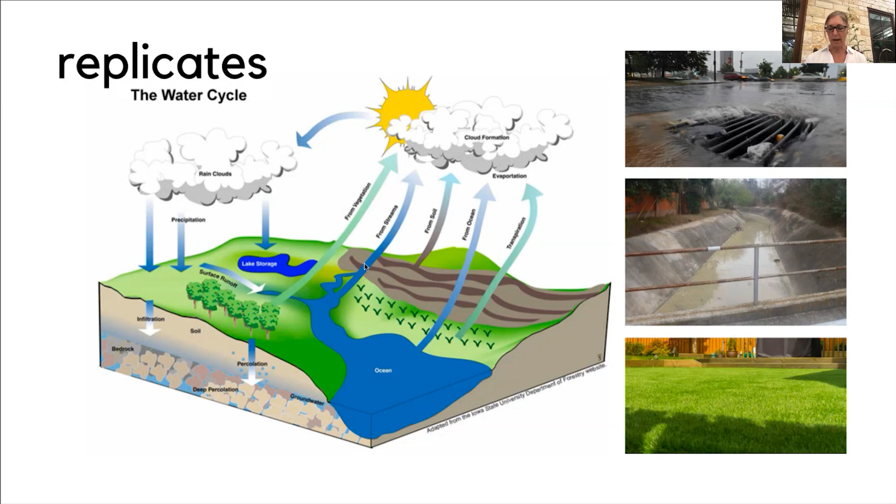Another thing that a lot of people don't know is rain actually has in it lots of micronutrients and minerals and things like that. Even things like washing poop off of a roof, that's a nutrient. There's nitrogen naturally in the rain. Lightning, when it strikes during a rainstorm, actually adds nitrogen to the rain, and then it falls on the earth and nourishes your plants. So when you hear folks like the Austin Water Utility talk about wanting you to use rainwater on your landscaping instead of city water, part of that is because rainwater is healthier for your plants. The city water has been treated to make it safe for you to drink in your house, but all those micronutrients have been removed. So when we're thinking about healthy soil, reviving the soil, nutrients, rainwater is going to be a lot healthier and happier for your trees, your plants, your soil organisms.

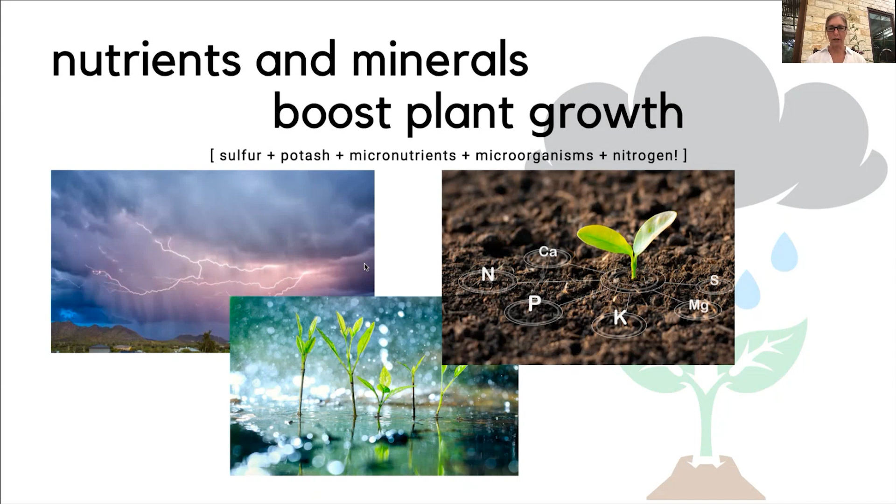We have hard water in the city. It means it's a lot more alkaline instead of acid based. Rainwater is going to be neutral. It's going to offset the impact of our hard water that we pull from our groundwater and from our aquifers and from our rivers and lakes. That's infused with a lot of alkalinity from the limestone around central Texas.

And so when we use rainwater to balance that, it's going to offset the alkalinity in the soil, and plants like neutrality or a hint of more acidic soil. So if you're getting that rainwater in there instead of just the water from your hose and from your irrigation, you're going to offset that impact of the alkaline water.

Catching and holding rain on your local property helps downstream from your property as well. So anything that's been settling on your roof before the rain hits it, like pollen, bits of insects, bird poop, just dust that's been flying around because it's dusty, anything that's been in the air, if that rainwater washes off your roof and goes into the soil first before going down into the drain system, your soil is going to catch those contaminants and hold on to it.

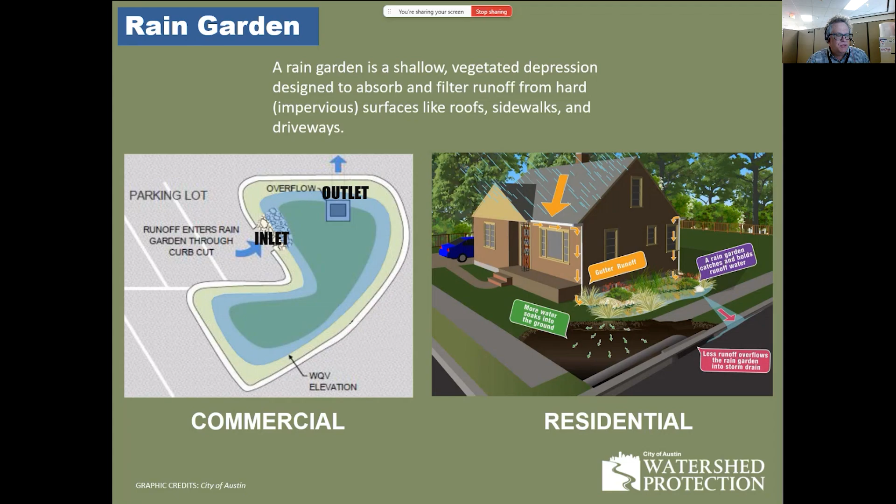This is an example of what everybody thinks of when they think of a rain garden around town. It's been in a lot of things. So, you know, it's naturalistic, it's planted up, lots of plants, water in the bottom. I'm going to go over the whys just a little bit because Paige covered it probably way better than I do. But the general reason we do all of the green infrastructure is what we call urbanization. Basically, when we create these impervious surfaces that cause the water to run off, and then it goes off into the creeks and causes all sorts of problems.

Those issues are addressed in a lot of ways at larger scales, but the rain gardens are sort of a bonus. So main reasons we need to build them are climate change, erosion, stream degradation, pollution, and also water supply. Climate change, we'll just gloss over this because Paige covered it better. It's just getting hotter and the rain's more unpredictable. In addition, the weather is both hotter and colder than it's usually been, so it creates a lot of issues to be dealt with. This is just a few more examples. You can go over this at a later date.

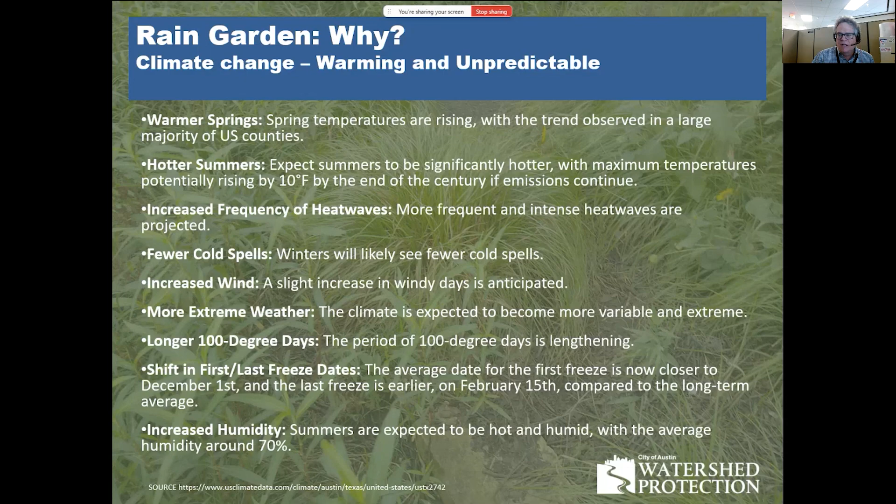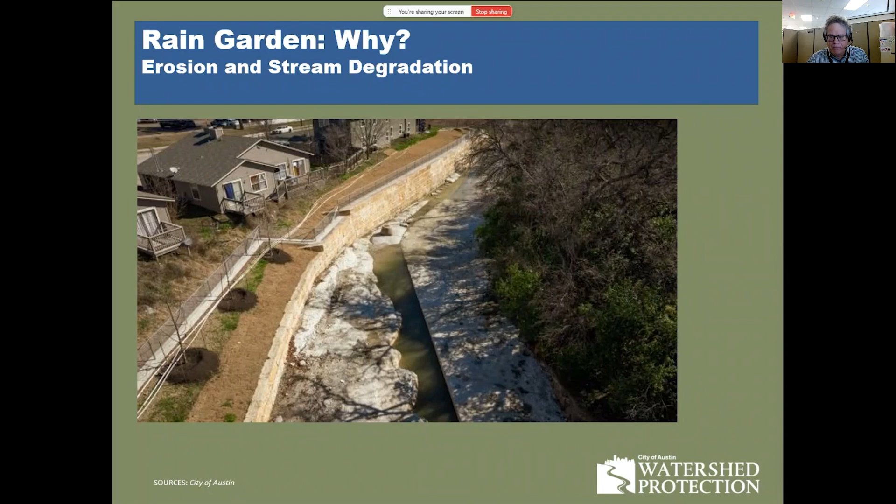And we even have things like in the olden days, the water department put the sewer lines in the creeks because they were the low spot. And that was just logical to them at the time. So we have a lot of these that we're working on taking out and abandoning as part of those repairs over time.

A big ugly one, of course, is the pollution from all the non-point source as well as point source pollution. Non-point source being things like brake dust and rubber tires, other things that land all over everything, and when it rains, they get washed in. Other stuff is like oil from leaking cars and things that's really common. You can see it's pretty gross.

And then Christopher will cover this probably more, but we're also growing incredibly fast and we already have water supply issues. So using rainwater in rain gardens helps not have to use treated water that we just simply don't have. This is sort of the projected growth. We're over here right now, about 1.5 million people projected to grow to 4 million. And as you can see, we just don't have this water.

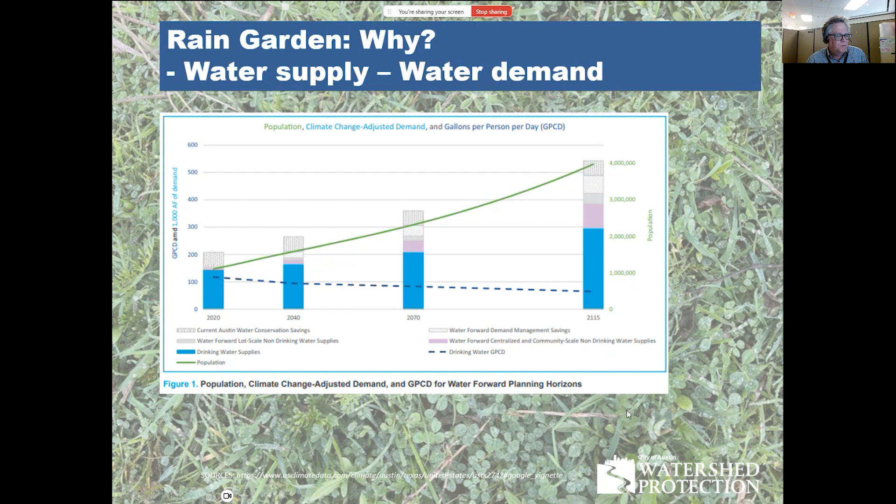Rain gardens are part of both our regulatory stuff that we do for development and also part of the structural benefits of rain gardens, help manage the runoff, reduce flooding. There's aesthetics. There's a lot of environmental services that you can do with the extra vegetation, like urban heat island mitigation with trees and shrubs, carbon capture, and capturing the water and infiltrating it helps with groundwater recharge.

So starting with how to do it, the first thing is figuring out where to put it. You'll see a lot of advice on the internet and in other books and things about placing rain gardens in low spots. I generally don't suggest low spots unless you can find a way to drain it, because low spots tend to be boggy and they don't drain very well. And that's sort of a different situation; we want to avoid wet spots if we can.

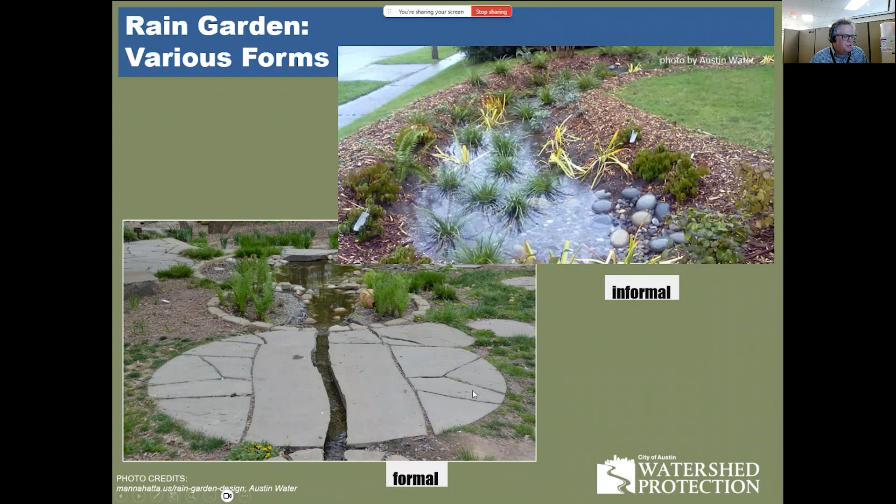Rain gardens can take on essentially 2 basic forms: informal, just sort of into the landscape with flowing shapes, or something more formal. It depends on what you're really looking for and what your existing landscaping's like. If you have a formal landscape, you probably want to continue that with a formal rain garden.

All right, nuts and bolts of getting started. Once you've determined where it goes and how you want to do it, the first step is to dig a hole. I generally recommend a sharpshooter, which is a sort of long, narrow shovel, because you can dig a straight down hole, or post hole diggers. You don't want to pry a lot and fracture the soil around the hole, because that will throw off the readings, because it'll let the water bleed out into the side.

So dig a hole about 1 foot deep, about 6 inches across, fill it up, let it drain out, and then fill it up again. Generally, the measuring is less important than whether or not it drains a second time within 24 hours. If it drains twice within 24 hours, you have a pretty good place to build a rain garden. And then you need to determine how big a rain garden you need. So here are the little calculations on where you're collecting the rainwater.

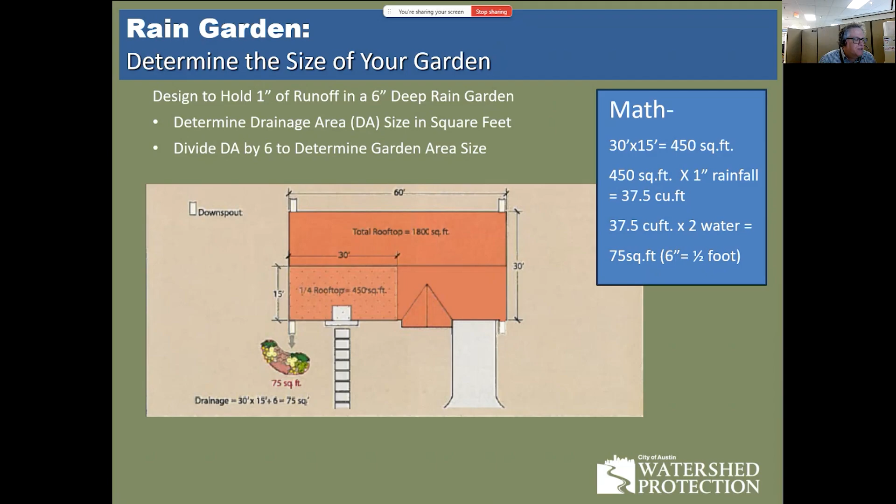I put the math on how to actually change it up, if you want to do a deeper rain garden or a shallower rain garden because your percolation test didn't come out the way you wanted it. You can vary that to get the size for your different types and different sizes of runoff areas and soils. This is just some quick guidelines of how big roughly things are.

So now that you've got everything determined, you know where you want to put it. You've got to do your layout and start removing the soil surface and all the plants. Dig all that stuff out, and then excavate your basin to about 6 inches.

Slope the sides so that they don't erode too much. A shallow hole like this, 1-to-1 or 2-to-1 is usually fine, because they're very shallow and won't erode too much. But in larger basins, we use 3-to-1, which means there's 1 foot of rise for 3 feet of run. So the bank slopes over 3 feet to rise 1 foot.

Then you want to create the enclosure of your basin with the soil you're excavating. Generally go a couple of inches higher than your outfall elevation, to direct that water to where it overflows in one place. If you make it completely level, it will tend to overflow and cause localized soil collapse, coming out in places you didn't predict. So give yourself some extra dirt over there to allow you to direct that water.

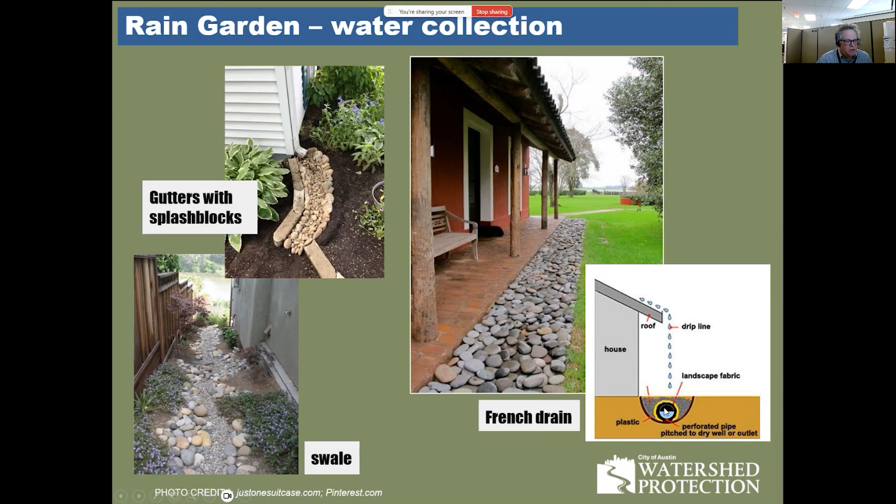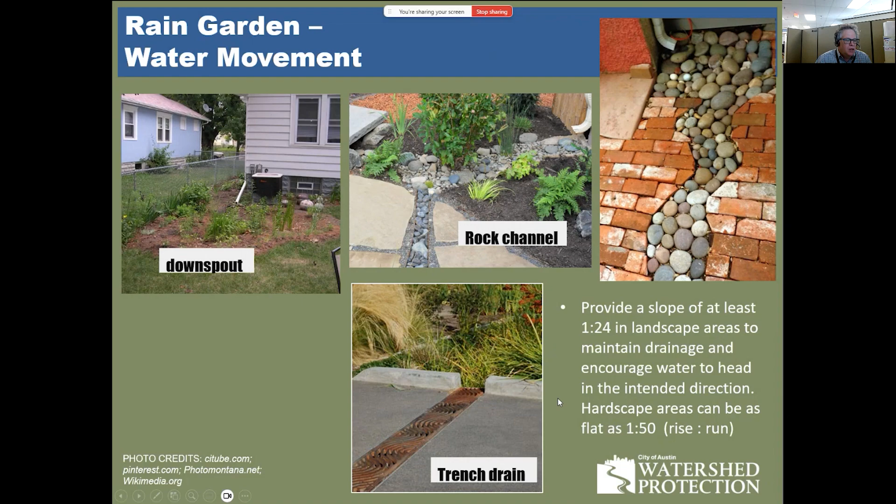A few more examples: you can extend the downspout so it goes all the way out. A couple more rock channels—this one can also be for collection. You can do a trench drain, like across a driveway, to catch the water. They usually come with less decorative grates, but this is a really nice one.

Some alternate water collection areas besides roofs: you can also use driveways. In this instance, they basically put a garage door seal across their driveway and used it to catch the water coming off the house from the downspout, from the garage, from the whole driveway, and then ran it through a series of rain gardens that are tiered because of the slope. So that's just another way you can harvest water and put it through a rain garden.

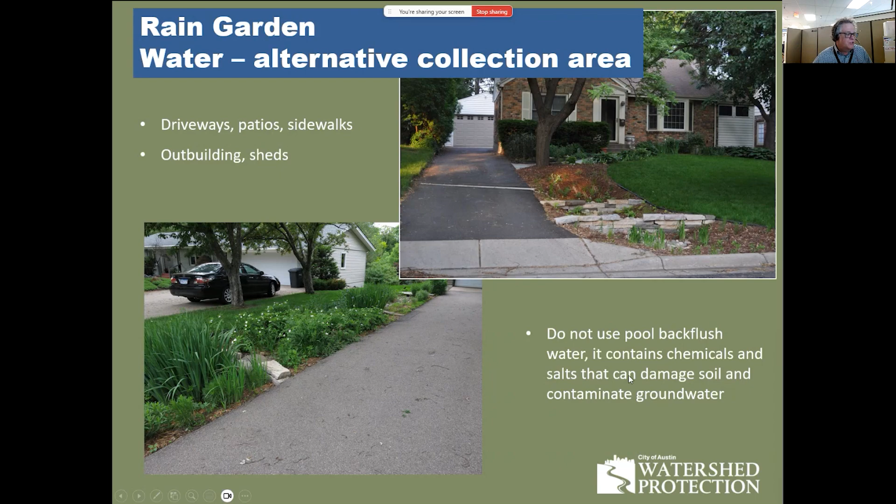One thing to be careful with is not using pool backflush water. There's a lot of chemicals in there that are very damaging to the plants and the soil, so it's better to take that into the regular sewer so it can run through a water treatment plant.

It can save a lot of money and get a lot more diversity than you would get with container plants. It kind of provides nature's influence on where things go. They will tend to come up in a spot they like in the rain garden versus a spot they don't like.

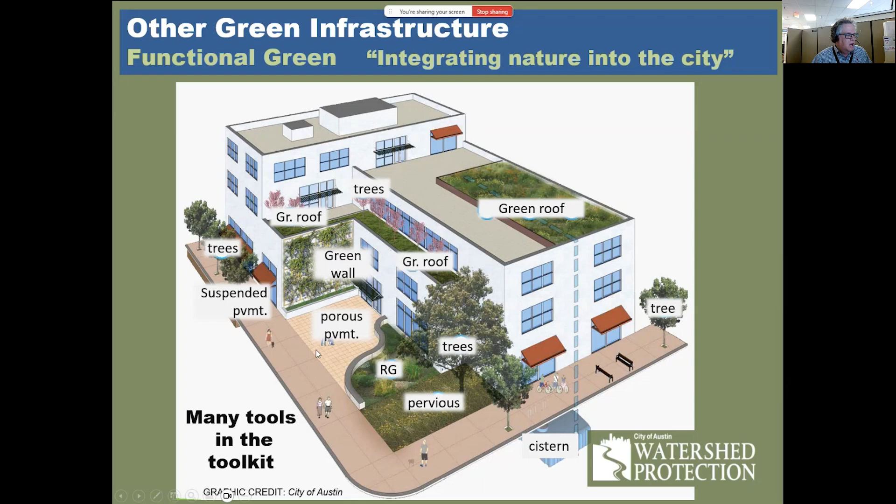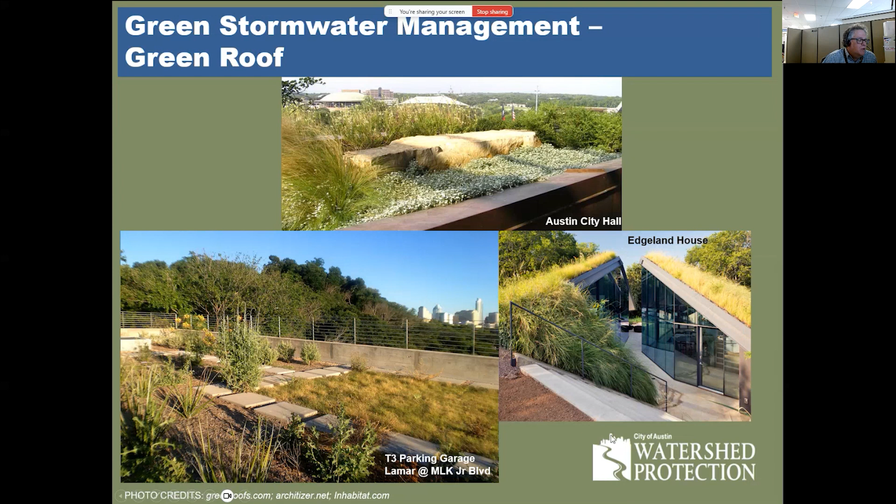Green walls mostly fight heat islands. Some examples of green roofs: Austin City Hall has one, essentially on the top floor of a parking garage with a great view. This is an example on a really high-end custom house that is almost underground, where basically the prairie goes up over the top of it.

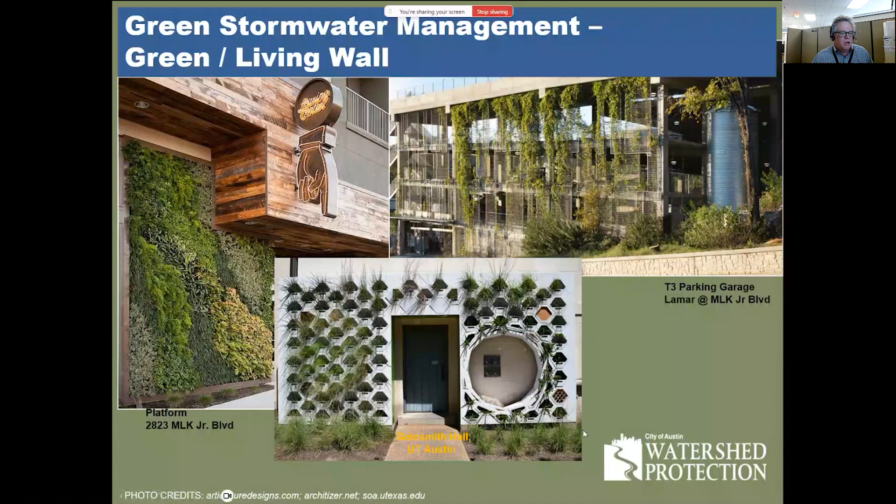A couple of green living wall examples: a really complicated one that requires a lot of care and costs a lot of money, but looks awesome. We have a prototype one on the UT campus, and then the minimum version, where vines are growing up trellises to mitigate a parking garage aesthetically and environmentally.

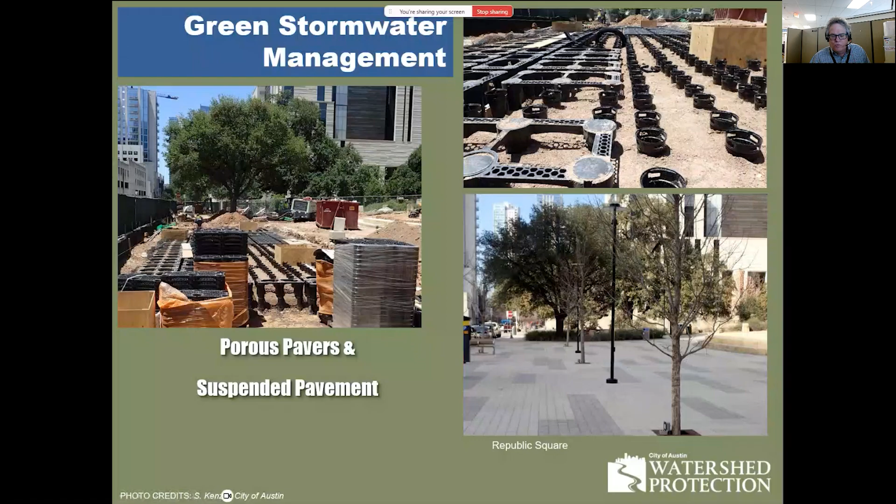An expanded version of that is suspended pavement, like they did at the federal courthouse. This whole area, as far as the trees are concerned, is essentially a lawn. The water falls through it, and the roots grow unrestricted and uncompacted underneath it. It's fairly complicated, fairly expensive, but when you need a really durable solution for a really high impact location, it's one of the options. A couple more examples.

Porous pavers act pretty much like any other kind of porous pavement. This is an example of a trail out of Pease Park. A little picture of how much water you can actually put on a porous pavement - it just goes right through.

They basically take a graded crushed rock, which is angular, and then coat it in cement paste. By carefully placing it, they keep pore space in there while maintaining the strength of concrete. So it's a developing technology, but when it works, it's really great.

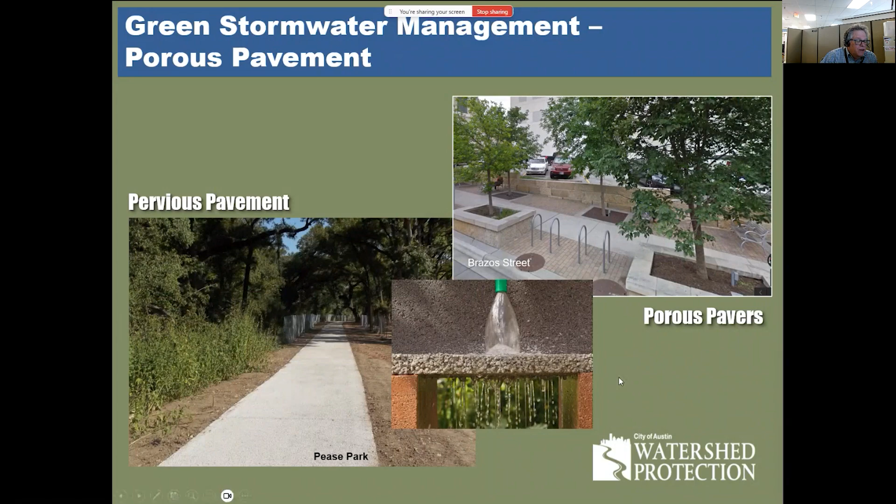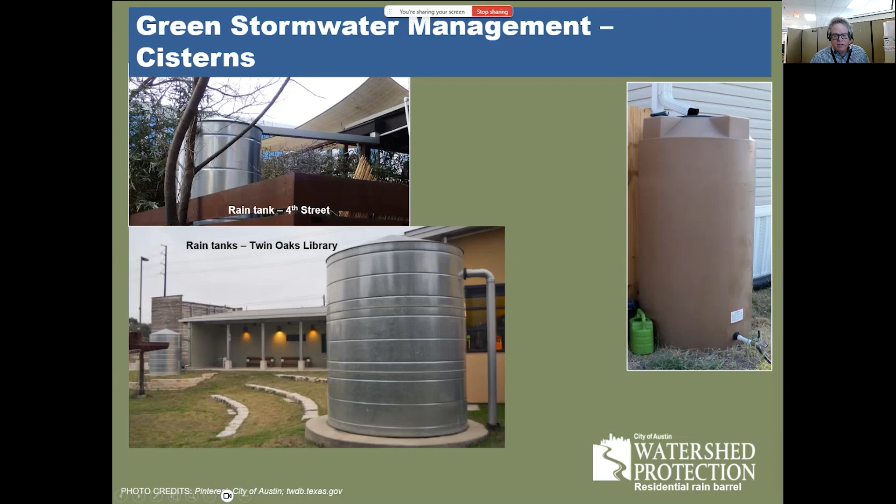Chris is going to cover cisterns in his talk, but here are a few examples of catching water as it comes off the roof, with an overflow that goes to another rain garden. They can be very simple - this one just has a hose. Or they can be really complicated, with pumps and all sorts of stuff.

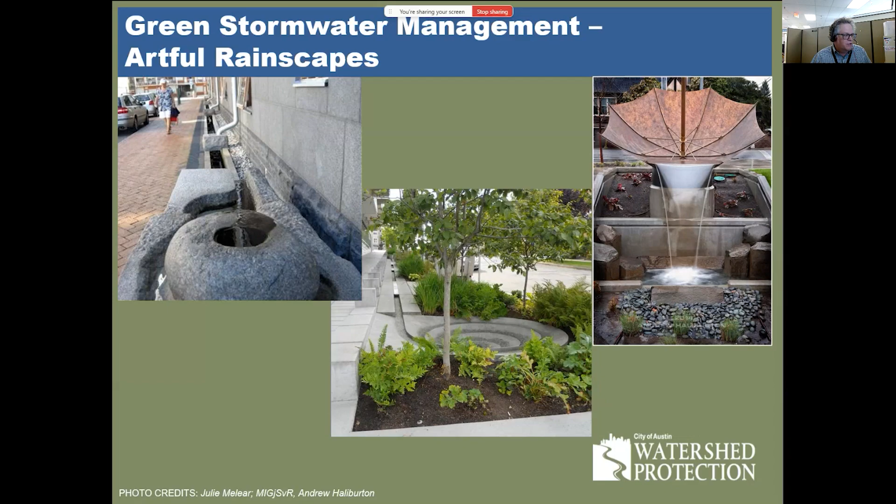Before we finish up with rain gardens, I thought I'd throw in a couple of artsy examples - really complex, very attractive, but also relatively expensive. Sky's the limit with rain gardens, as it is with all gardens - there's almost endless options of things you can do.

A couple more resources: there's some things in the Environmental Criteria Manual, which you can find just by searching for that. The Earthwise Guide to Rain Gardens is one of our publications - that's this one here. Some stuff about rainwater harvesting, porous pavement, soil decompaction, and the Grow Green Guide again. Some resources for rebates - Chris will cover those in the next presentation. There are also other resources out on the internet from local non-government and government sources to get even more info.

So that's the gist of the short presentation.

Big thank you. I love that you talked about residential gardens, but you showed us lots of great examples of bigger systems around Austin. That was so fascinating, those trees and the plaza. So thank you for hanging in there - I feel bad because I know you're not feeling so great, so extra kudos to you for being a trooper.

One thing I thought of when we're talking about slowing down water - I remember at Stacy Park by Blunn Creek, they call it a vegetative filter strip, but it's just a row of big muhlys. So when the water's sheeting down the side to the creek, it just slows it down. So if nothing else, plant a few big muhlys in a row, and when the water's flowing, it can help slow it down. Vegetative filter strip sounds so official, but it's just a row of big muhlys. Anyhow, look, there's Christopher Charles from Austin Water.

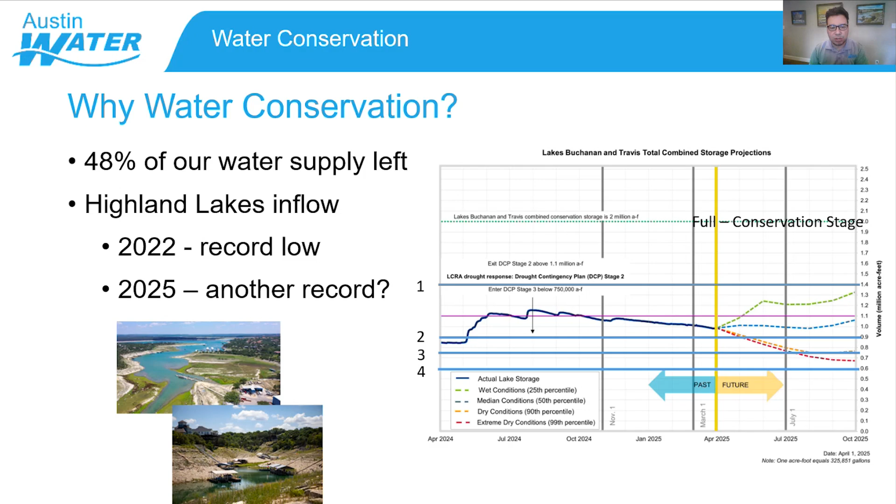One thing I get asked a lot is, where are the applications? If you go to waterwiseaustin.org and look under rebates, tools, and programs, you'll find a button that says click here for residential programs. We just changed that button recently, so I didn't update the presentation.

Do not Google. You'll find some old application from years back that might be outdated. We really want you to use our online application. If you're not tech savvy, you can call our main line, and you can request a paper application mailed to you.

Some of the rebate tips I have here, since I get asked these questions so many times: some rebates require pre-approval, so make sure you read up on each program you might be interested in completely, so you know whether you need to get the job done first and then turn in the application, or turn in the application first and then do the work.

Also, we ask for receipts, and we want to make sure the receipts show they're paid in full and not just estimates. We get a lot of estimates that still show a balance due.

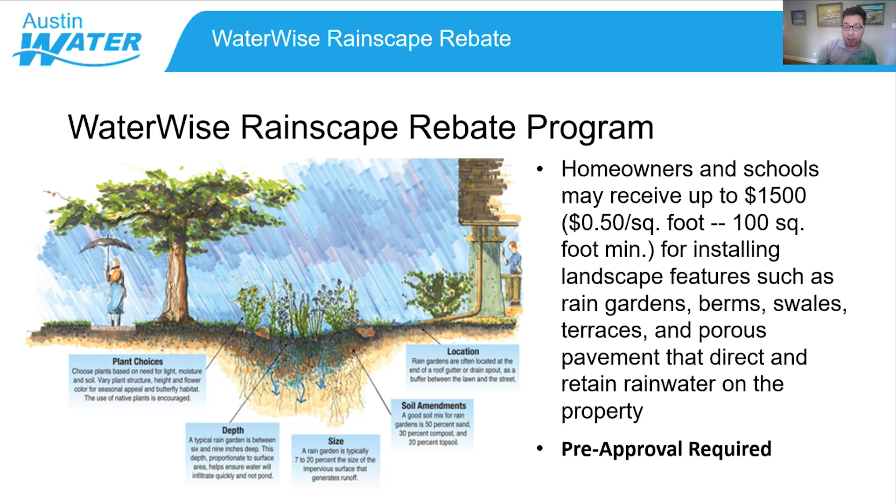So let's dive into the first program, which is the WaterWise Rainscape Rebate Program. We're giving 50 cents per square foot for building any type of green infrastructure, as we said earlier, which includes rain gardens, berms, swales, terraces, and even porous pavement that Drew was talking about earlier.

You're going to see a lot of pictures. I guess Drew and I picked photos from similar places, so you're going to see a lot of the same photos here in this presentation. But basically, we're trying to divert the water off the roof into an area that can collect water.

We were talking about types of plants for rain gardens. From talking to the public and people that go into this program, two issues that come up with plants are, one, plant availability. You might have this grand scheme of making this rain garden look awesome, but the plants are just not at the nursery at certain times of the year. And then also plant failure.

Please don't get disheartened by plants not making it over the first 6 months or year. Sometimes the plants just don't like the type of soil. Sometimes they prefer morning sun to evening sun, and the like. So it's sort of a guessing game. My recommendation is to buy those small plants like Drew was talking about. They can adapt to soils a little bit easier. I wouldn't go over a gallon.

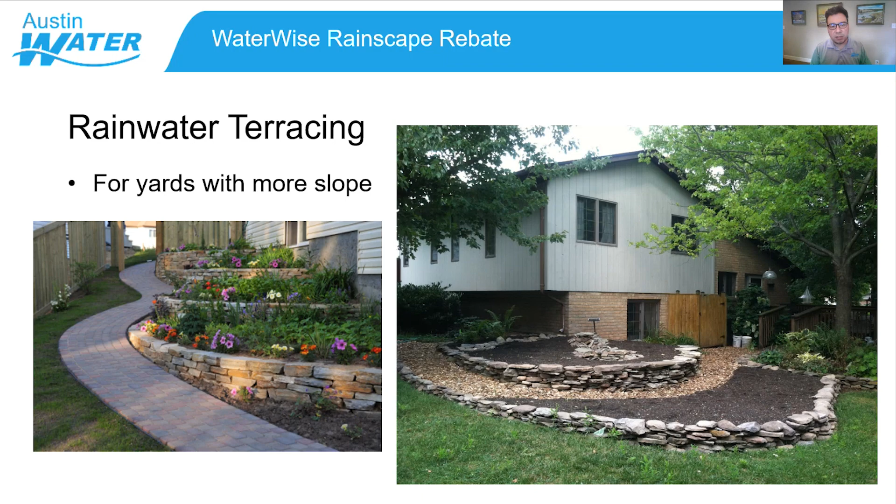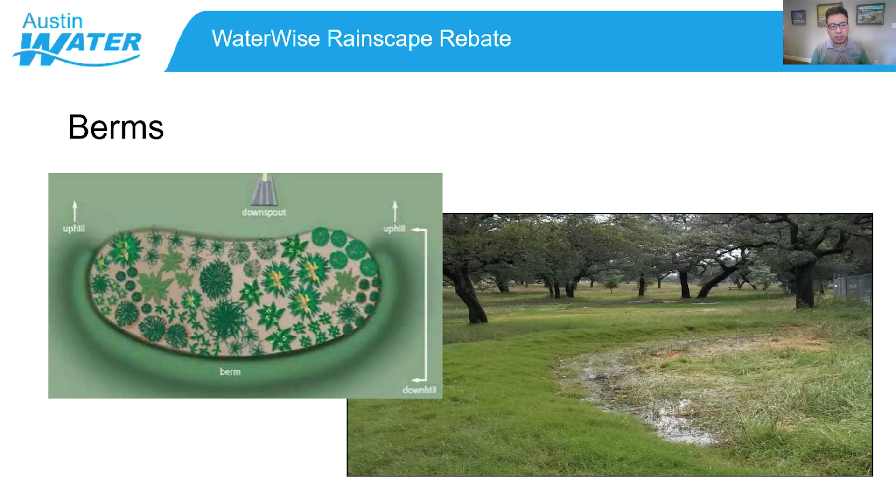Here's some pictures of terracing. The slopes that Drew was talking about, we want to try to slow the flow, right? We don't want that water just zipping down to your neighbor's yard. We want to try to keep that water on the property so that it benefits your mature trees. Berms, here's some large scale berms. Basically, the whole area is not depressed, it's just one side. And then you create your rain garden there.

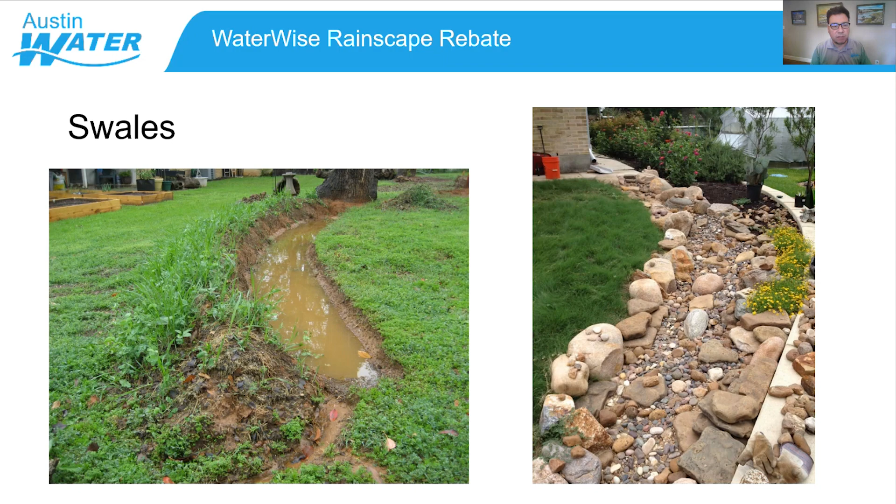Swales, this is what a lot of people do here in town because they're having drainage issues. They want to try to get that water to basically go around areas. In this particular picture, you'll see that they make this swale so the water goes around. They don't want the water going towards their vegetable garden on the slope, so they're making it go around.

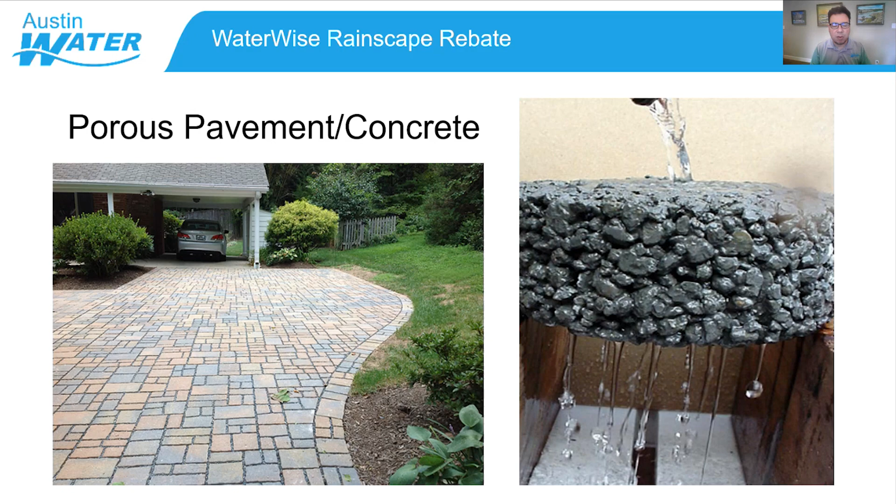Here's some other pictures of porous pavement, porous concrete. We've only had one person in the program do porous pavement. There were some issues right up against the house, and she wanted to make sure that water was infiltrating instead of collecting back there.

The rainwater harvesting program basically gives 50 cents per gallon for non-pressurized systems. That means rain barrels and cisterns that do not have a pump. If you do include a pump onto your system, we'll give $1 per gallon, because when you put a pump onto a cistern that's over 500 gallons, 501 gallons and above, you will need to get a backflow prevention device that is quite expensive. So we're trying to help out with that cost there. The maximum rebate amount is $5,000.

Now I remember people asking about roof surface. What's going on with that? What is the best? And Drew was right. Metal roofs are the best for collecting rainwater. Once you start going into those shingle type products that are tar and other stuff that sort of breaks apart over time, you're going to have a little bit more maintenance in your rain barrel or cistern, because you're going to have to filter that out, because those materials can clog up filters. It can clog up gutters as well. And also the cistern itself, it can collect a lot of material.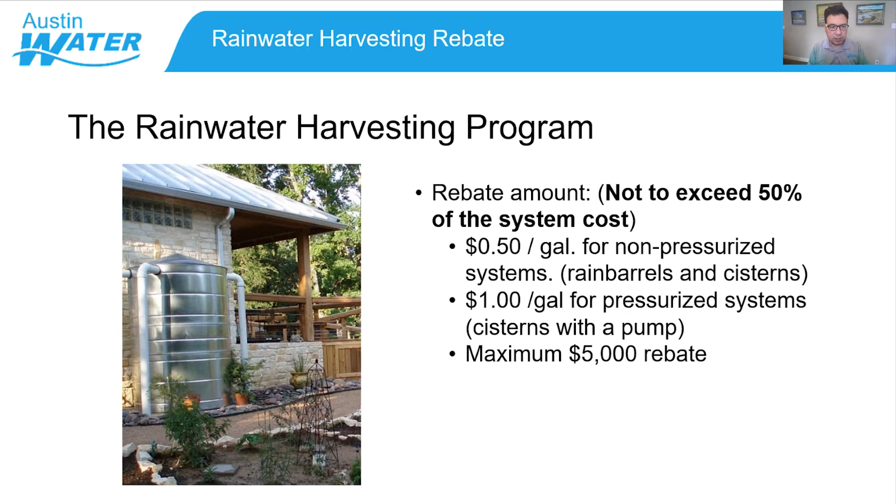Now, sometimes you're going to want that cistern in your front yard because of the way that your property slopes, and it might make more sense to put it in the front, but that's when you're going to have to talk to your HOA to see how you can screen it so that it abides by their guidelines.

I already talked some about this. If you're going to get a cistern or a rain barrel, 500 gallons and less, you can go ahead and install it. But we look at combined storage. So if you're putting together 6 100-gallon cisterns, as in this photo here, I know this is just 4, but if there were 6 and they were all 100 gallons, then that's a 600-gallon system, and so we would ask you to go ahead and get pre-approved before installation.

But if it's just something like a couple of 55 gallons tied together, that's fine. You can go ahead and get them installed and then turn in the receipt with the application. And you may only apply once. We get this all the time. People don't realize how much they find uses for the rainwater, so they'll want more. But in order to go into our program again, you have to wait a full 12 months. That's because we're trying to analyze the program to see if it's actually saving water, so we have to look at a year's worth of meter reads to figure that out.

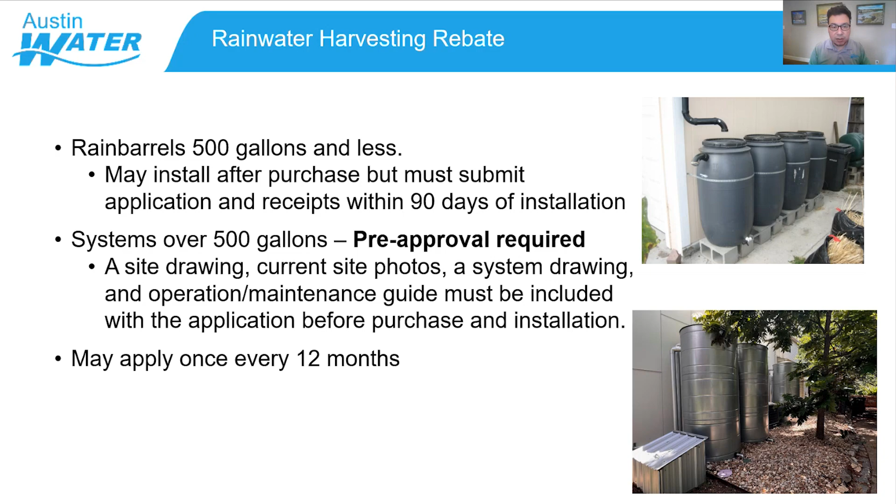Oh, one more thing about the rainwater harvesting program. Paige said earlier that you can use these cisterns in times of emergency. Austin Water would like for you to definitely use that water in times of emergency, but we want you to flush toilets with that water and use it as you would reclaimed water or something like that. We do not recommend boiling it and drinking it, because unless you have a high-end filtration system, we want you to use city water for drinking because we can guarantee that it's been treated correctly. We don't know what's been sitting in your tank. So just want to put that out there.

Okay, so I'm going to move on to our other outdoor programs. I've been running these programs for years. These are some of our more popular ones. The WaterWise landscape program. We are now giving $100 for every 100 square feet that's converted from turf grass to native plant beds. So we changed the minimum. It used to be 500. Now people can do 200 square feet. That's been helping a lot of people cost-wise because they do little sections at a time. They call them phases. So they might do 2 or 3 phases, which is fine as long as they hit that max of 3,000 square feet. That's when the rebate stops for them.

No artificial turf, no gravelscapes. We are not incentivizing that at the City of Austin. Watershed Protection, Austin Energy, Public Works, and even Parks and Rec, Wildlife Austin have all given me reasons why not to incentivize those treatments. I have to deny about 15% of the applicants because they have already signed contracts with contractors putting in nothing but gravel and cactus. This is not the American Southwest. All that's doing is adding to our heat island for Austin. Got to say that first and foremost.

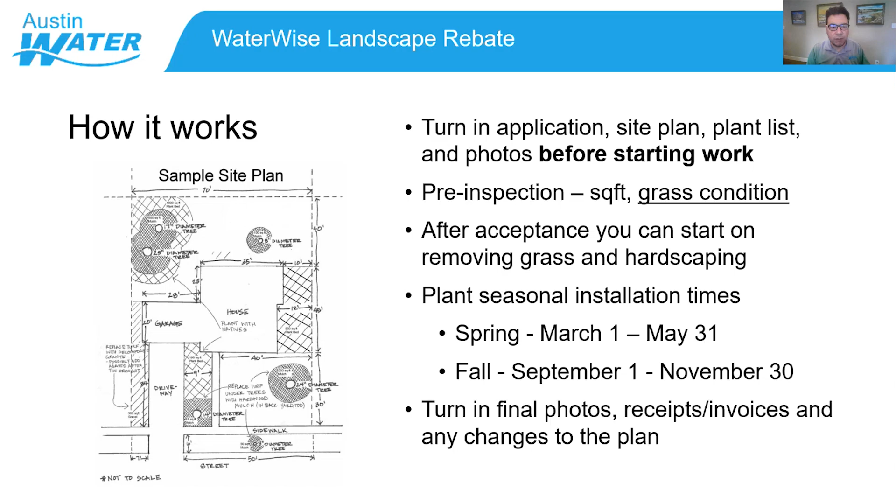Once you are finished, you turn in photos, you turn in the receipts showing that you're paid, and any changes to the plan. I just had 2 people that signed up for around 500 square feet, and they doubled it. They said, you know what, we didn't realize that we had all this material. We wanted to go from 500 to 1,000 square feet. They just made themselves $500 extra for their project.

So the plants must be from the Grow Green Plant Guide. We've talked about that earlier in the presentations. You must have 2 to 3 inches of hardwood mulch as your plant bed treatment. Conversion area must comprise of 50% plant cover at maturity. We just don't want you throwing down mulch and calling it a day.

What that means is if you get like 4-inch plants or 1 gallon perennials, I know exactly how much they're going to spread out. So when your project's done, it might look like a lot of mulch, but I do know that it's going to spread out over time and cover at least 50% of that area. Mature trees will count for that 50% plant coverage. So if you have a mature tree next to the area that you're converting, that tree drip line will cover that area.

All automatic irrigation systems must be capped off or converted to drip in the conversion area. No new automatic irrigation systems will be allowed. If you don't have one and you put one in, that's sort of just using water in the wrong direction. Automatic irrigation systems use the most amount of water.

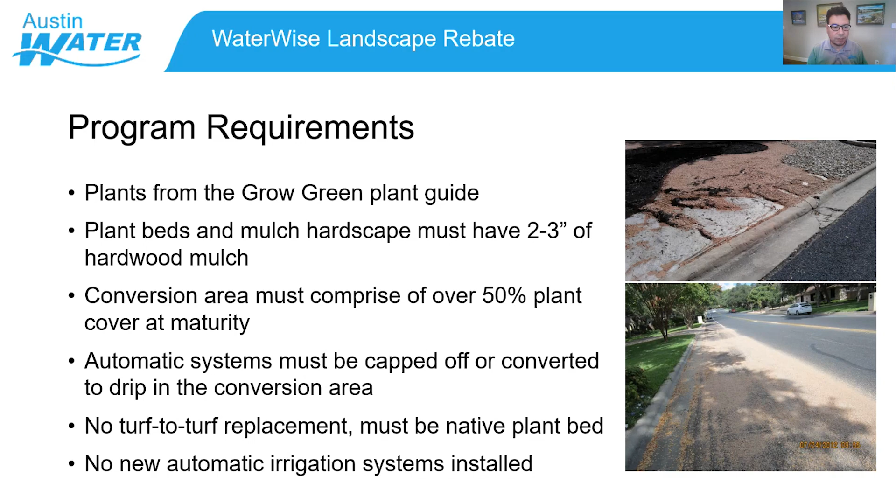So no turf to turf replacement. Well, we've seen in the past that when somebody goes from like St. Augustine to Buffalo, they water at the same amount, and that's been proven over the years. I don't know why, it just happens. I guess because people don't want to see the yellow grass in the summer when it gets above 95 degrees or something to that effect. Like I said, no new automatic irrigation systems installed.

For those with irrigation systems, we have the irrigation upgrade program. You can get up to $1,000. You or a licensed irrigator must do the work. It must be within 90 days of completing the work that you turn in the application. What we rebate for is items such as converting spray to multi-stream rotors. When you go to multi-stream rotors, you're using heavier droplets of water that don't turn into fog or mist and are more efficient. You can convert a station or zone to drip. You'll get $50 a zone.

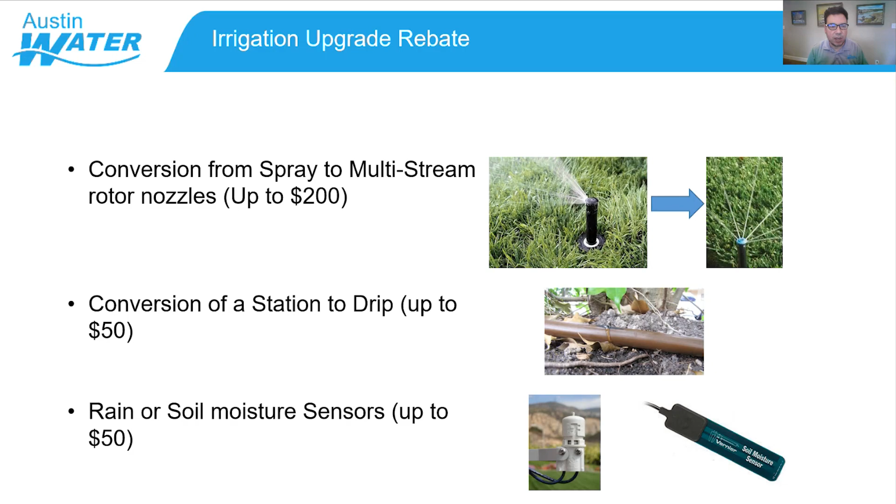You install rain or soil moisture sensors that will shut off the system if it just rained, or if the soil's still wet, and we can give you some money for that. Pressure regulating, that's a big thing here in Austin, especially in West Austin. Somebody that lives on the bottom of the hill will have more water pressure than somebody that lives on top of the hill. We will give you money for that.

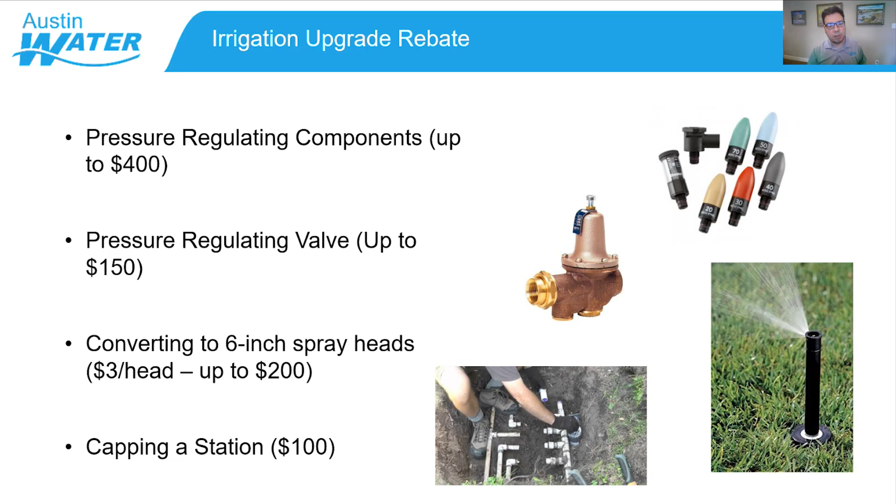And just converting from a 4-inch spray head to a 6-inch spray head makes all the difference, because those older systems that might have had like a 2 to 3 inch pop-up head, well, guess what? Over time, the grass has grown, and now the water's shooting the tall grass and it's not going over the grass to get where it's supposed to go. So we'll give money for that. And of course, my favorite is capping the station. So if you're just taking out the system completely, we can give you $100 per zone for taking out your system that you don't even use anymore.

Maintenance, we talked about maintenance. We do have the Landscape Survival Tools program. If you buy 2 cubic yards of compost or mulch, we can give you $50 for the compost, $40 for the mulch. That is cubic yards. That equals 54 cubic feet, which if you buy 2 cubic foot bags is 27 bags.

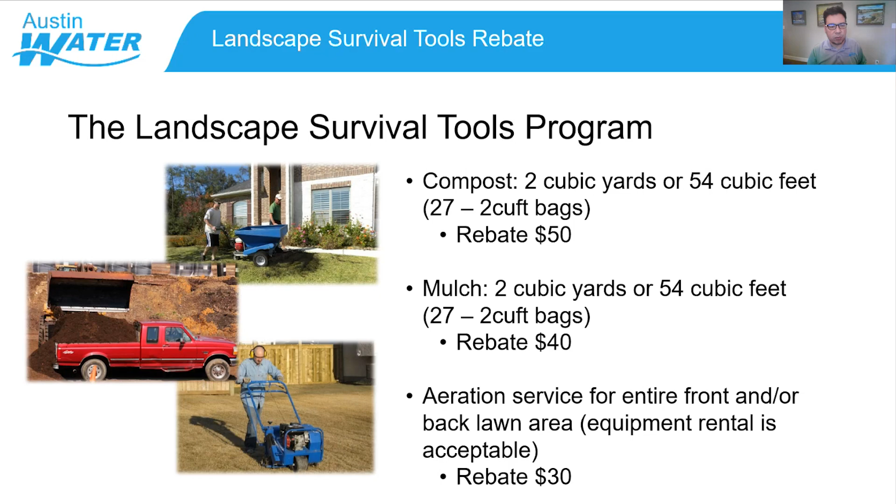There's also lawn aeration service. You can get a contractor or you can rent it out at an equipment rental store. We can give you $30 for that. We will not give money for tools. So if you buy an aeration tool, you will not be eligible for that rebate. This rebate is every 3 years. You buy the stuff, you keep the receipts, you install it, you take photos of the completed work, and then you turn in everything within 90 days. We do have a watering timer program.

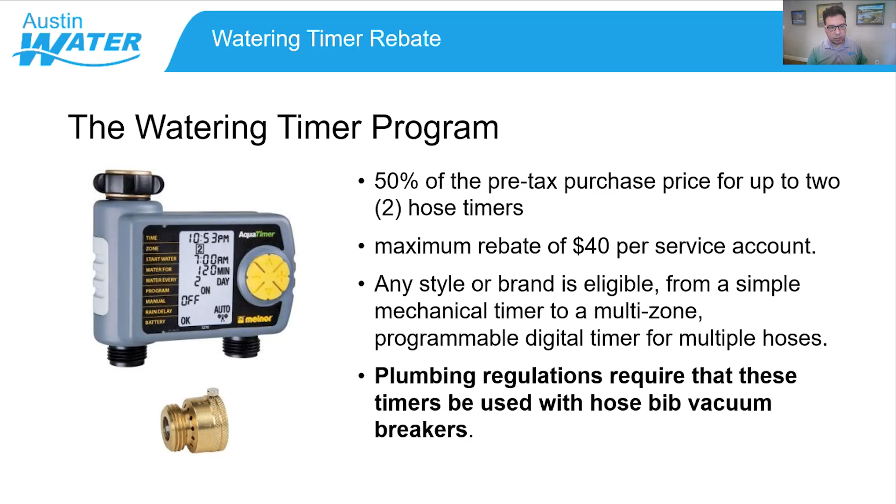This sort of acts like an automatic irrigation system for those people that use hose sprinklers. So you hook up your hose to this, put your sprinkler, oscillating or whatever kind, hook it up, and set the timer. So if you forget, you're cooking dinner and forget about your sprinkler that's off in the front yard, it will shut it off for you.

We do have a gray water program for residential properties. That's the Laundry to Landscape program. We can give you up to $150 for hooking up a diverter to your clothes washer that diverts the water from that machine out into your yard, where we prefer you putting it into a basin. It can be a basin that has trees or plants. We do have that program.

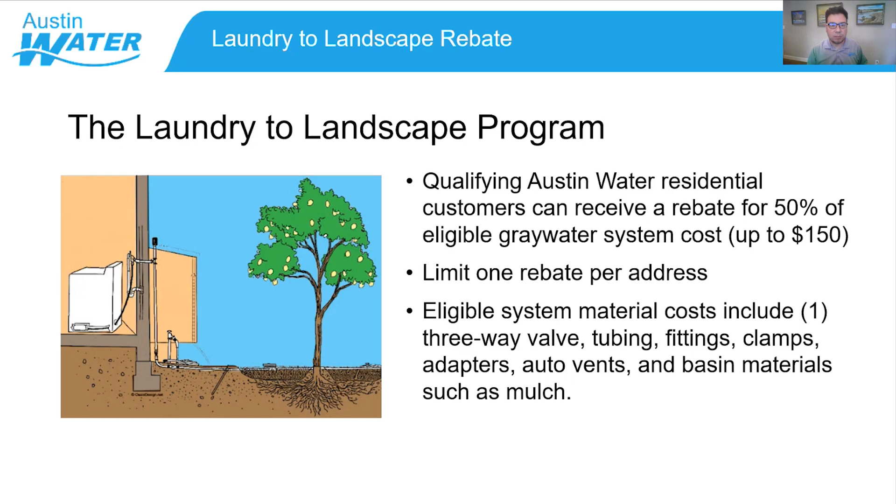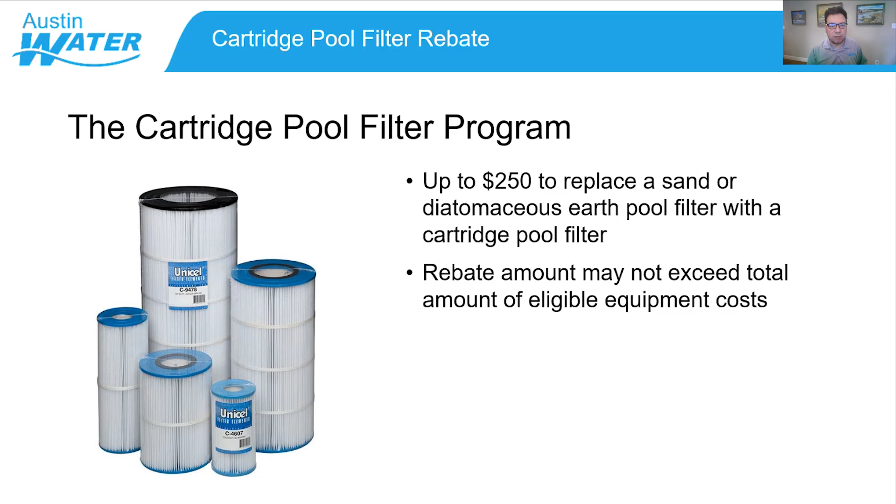We also have programs for pools. If you switch over to a cartridge pool filter instead of a sand filter that uses backwash, and you waste a lot of water with the backwash of the sand, we can give you money for that new cartridge pool filter. We also have a pool cover program, which allows you to cover the pool when you're going on vacation so that water doesn't basically evaporate.

For those of you that go to the library, we do have a couple of conservation tools there. We have one sunlight calculator and also a hose end meter. So the sunlight calculator, you put it in the ground and it tells you whether you have full sun, full shade, part sun, part shade. Then you can go to the Grow Green Plant Guide and see what the light categories are for those plants, so you're planting the right plants for the right area.

For the hose meter, for those of you that do hose watering, you'll get a better idea of how many gallons you're using when you water. And I just put fresh batteries in all of those devices about 2 months ago, so they're ready to go at the library whenever you're interested. And if they don't have them at your particular branch, they will get them - it'll just take a couple of days for them to drive them over there.

We also have free water conservation tools in our office, but we found out that it's difficult for people to come to our office. So what we're doing now is mailing them out - that's all we're doing is mailing. So you can call 512-974-2199, and I'll give that number at the very end as well - that's 512-974-2199 - and get somebody to fill out a form. I believe there's a form online as well that you can fill out.